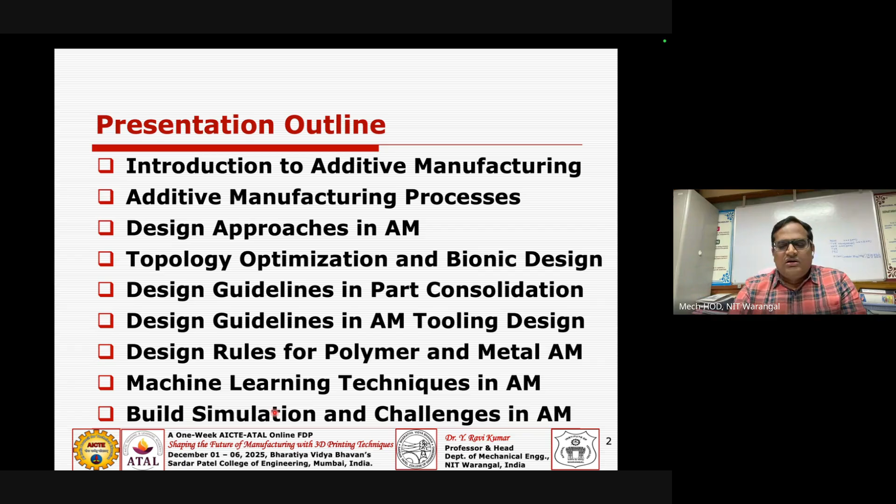So this is what I'm going to talk about for maybe the next hour or so. This is the presentation outline. Let us introduce this technology of additive manufacturing.

So additive is not a new technology. You might have heard the term rapid prototyping during the late 80s or early 90s, which was coined at that time. Now it has evolved into a manufacturing tool. Prototyping is a designer's tool, but now it has matured enough to assist the manufacturer, and a new category of manufacturing processes has emerged, called additive manufacturing.

And in common, layman terminology, this technology is also called 3D printing. Whatever you call it, the idea starts with digital data.

The input starts with digital data. Either that data comes from a CAD tool or CAD software, or it may be reverse engineering or digitized data, or even medical imaging like CT or MRI scan data, which could be the input in case of medical applications.

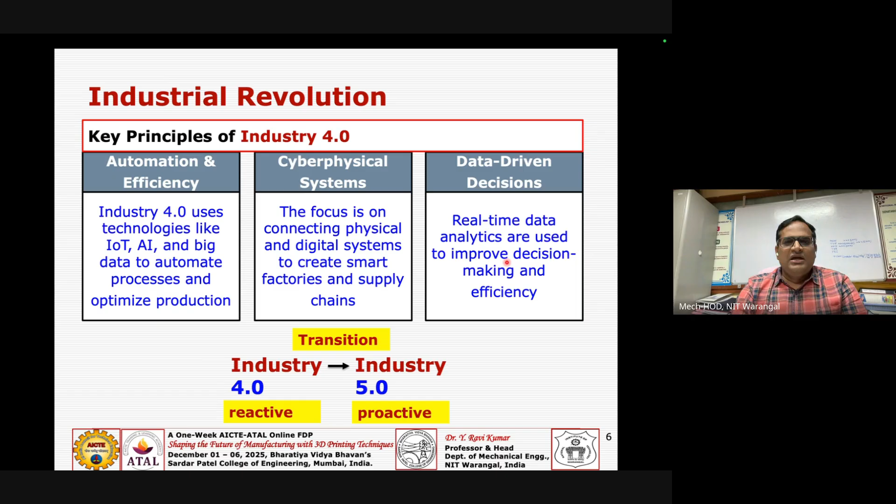Industry 5.0 is all about being human-centric, where workers are placed at the center of production, collaborating with intelligent machines rather than being replaced by them. People worry that with the fourth or fifth industrial revolution, jobs will vanish, but the idea of Industry 5.0 is human-centric and resilient, with flexible and adaptable manufacturing systems. That's what AM enables — you can adapt, customize, and personalize.

You can quickly respond to changes or any disruption, and quickly adapt AM as such. And sustainability, of course, AM, as we are talking about circular economy and the SDGs, Sustainable Development Goals, is quite inclined towards sustainability. So in brief, developing sustainability in products and services, that's about Industry 5.0, and AM will fit very well in this scenario. That's where Industry 5.0 is much about, AM is going to play a major role under this industrial revolution.

And we try to see the classification of manufacturing systems. Subtractive is the one where we have a lot of concerns like scrap or the complexity, or wherever you have a design change and need to quickly adapt. Subtractive is going to have a lot of constraints, especially if your product is complex, and now we are talking about bionic designs or topology optimized structures. So for subtractive, you have several constraints to meet those demands.

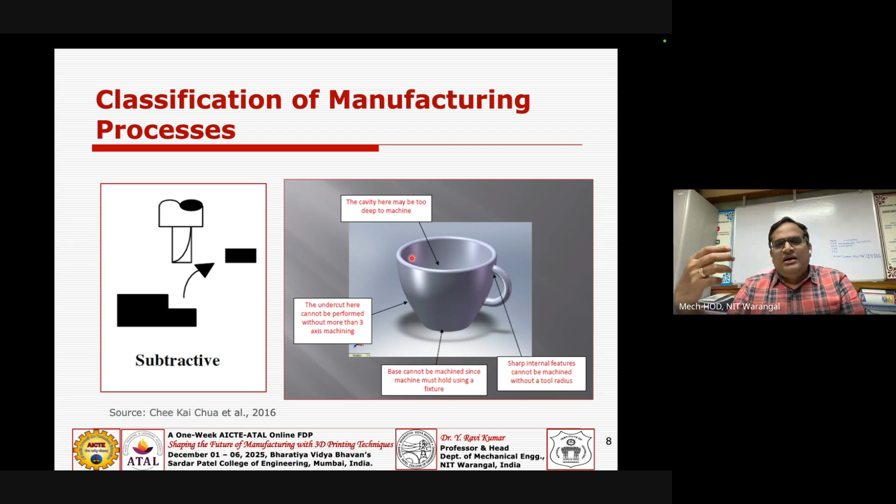Even if you try to understand, once you change the design from a simple square or a stepped kind of geometry to a free form like a coffee cup, you need to understand several constraints in case of subtractive manufacturing, like CNC technology or traditional machining technology. But you need not worry about those constraints once you migrate from subtractive to additive, where it's going to add the material. So your scrap is nominal, or literally zero, and even your complexity is free of cost here, with a lot of customization.

We'll try to understand what kind of benefits you get from additive versus subtractive. And of course, you may have a formative process, like making a mold or a die, which we use to force the billet to confine it to the shape of the tool. But again, how do you make this tool? The same story will repeat. But with additive, you don't require any die or any tool as such. So it's a kind of a new class of manufacturing, we can put it that way.

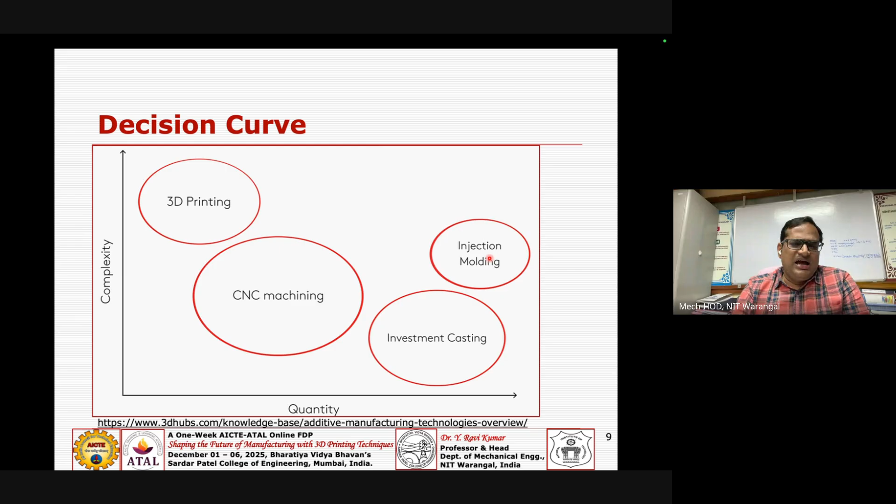So whatever may be the application, we need to start with the CAD or digital data we've been talking about. Then next you convert that to an STL file, that is the de facto standard or neutral format in AM. Then you transfer this file to a software interfaced with the machine, and set up the machine setup. It's something like a G-code, if you come from CNC, something like a G-code, but you are not writing any code here. With a single click, you are able to generate these layers or cross sections.

And then physical realization of these slices is done in the 5th step, where layer by layer it is fabricated, or built inside the machine. Then in the 6th step, we need to remove the part, say you have some supports, or we need to clean the part, then do that kind of post-processing in the next step. Or sometimes we need to increase the mechanical properties, or increase the physical or electrical properties, and so on.

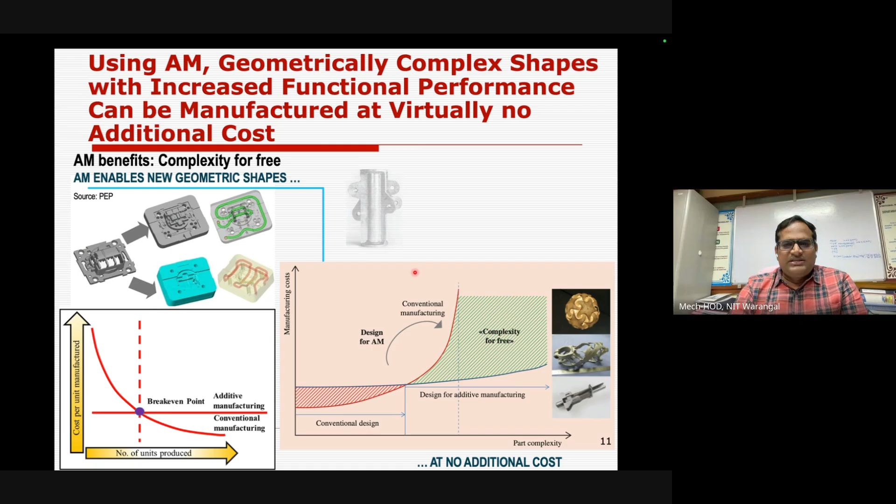Now consider manufacturing cost versus complexity. Say your design is so simple that you call it 1x complex, but now your product design changes to say 5x or 6x complex. Because of this 5x complexity, your cost is also proportionately increased to 5 times.

This is in conventional manufacturing. But if you want to make the same component through additive manufacturing technology, whether it is 1x complex or 5x complex, your cost remains only 1x. This is the biggest win here, why AM performs well with complexity. So we can conclude that complexity is free of cost in AM—you don't spend any extra money in terms of complexity.

Not only complexity—if you come from an injection molding background, your die consists of a conformal cooling channel where conventional manufacturing may not be able to make such a channel, but additive manufacturing can make these conformal cooling channels very easily. This increases the performance of the die and die life, and in that way your efficiency or functional performance of the system increases. So you're not just getting cost benefit, you're getting double benefit, even triple benefit.

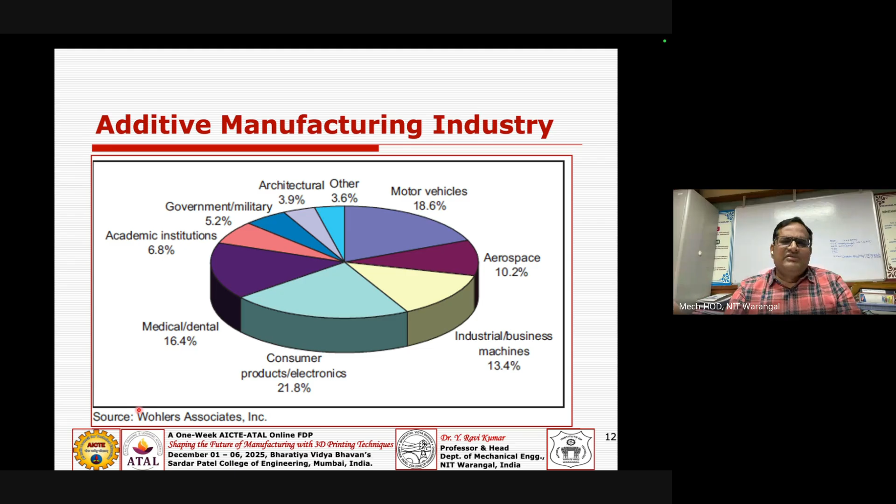If you compare with traditional manufacturing methods and look at the AM industry, consumer products and consumer electronics is the biggest market at 21.8%, followed by motor vehicle—automobile and automotive together—at 18.6%, and medical and dental together at 16.4%. Aerospace is 10.2%, industrial machines and business machines were 13.4%. Academic institutions like us may be 6.8%, government military 5.2%, architecture 3.9%, and others maybe 3.6%. This is the Wohlers statistics, which shows the market share of AM in various industrial applications.

Now we'll talk about AM processes. The previous talks were predominantly on materials and their characteristics, so I won't spend much time here. But broadly, we need to bring the feedstock in any one of four forms: a powder in granulated fashion, a filament in wire or rod form, a sheet, or a liquid. These are the four broad feedstock forms.

Coming to the materials: polymers—again thermoset, thermoplastics, amorphous, semi-crystalline. You can make metal alloys, ceramics, composites. So these are all the four standard engineering classes of materials.

Apart from the standard engineering materials, functional materials, electronic, shape memory, biological material, maybe a living cell or a stem cell could also be the material, or it may be food printing, or 3D printed houses in construction, building the structures, or building the bridges. So you have diversified materials here, not only restricted to the four classes of engineering materials. So you have an additional bunch of materials here. That is the winner here.

So anyway, I'm not going to spend much time on these AM processes. The 7 AM processes and feedstocks, as I already mentioned, may be a liquid, powder, solid. And then the AM principle would take longer to explain. But in a nutshell, it could be a polymerization process or jetting. It may be inkjet, binder jet, atomizing the powder particles, or melting and solidification, or joining. So all your 7 AM processes may work on different principles.

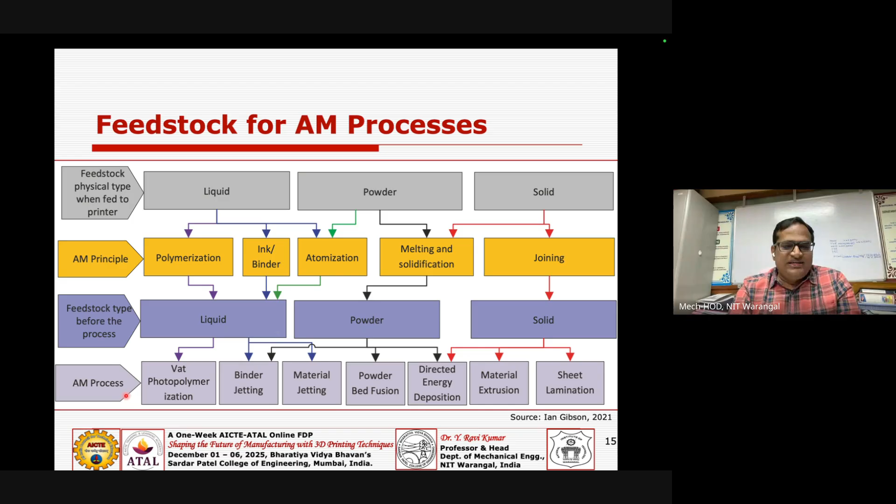And of course, your feedstock material and your energy source could be a laser, an electron beam, a plasma, or heat energy or whatever. So you may have different energy sources, but all your 7 AM processes have a specific feedstock form. All these are material specific, feedstock specific, and energy source specific, right?

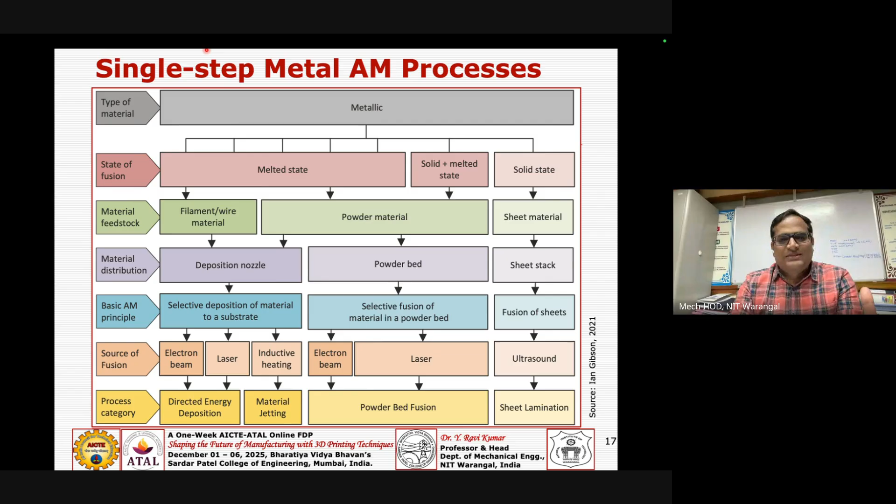I hope the previous speaker might have talked about a lot of materials, but in a single slide you try to understand amorphous polymers, predominantly the material extrusion process, and maybe polycarbonate through powder bed fusion. And your thermosets, predominantly you can use 2 AM processes. One is vat, another one is material jetting. And the semi-crystalline class of polymers, you have predominantly powder bed fusion technology.

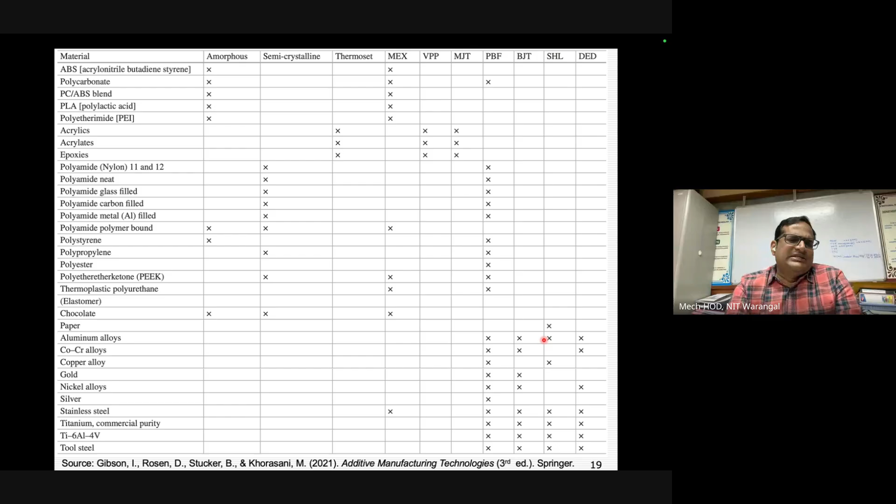And the metals and metal alloys, as we already discussed, 4 AM processes like powder bed, binder jetting, sheet lamination, and DED. These are the 4 technologies predominantly for metals. So with this, the materials and the physics involved in all 7 processes and the materials used for all 7 processes.

But these are some of the powder bed, directed energy and solid state processes, as we already discussed. Under these three, with powder, wire, foil or rod, you may have a laser or electron beam, or it may be blown powder, arc-based deposition, laser wire deposition, or electron beam deposition. It could even be ultrasonic additive, friction stir additive, or cold spray.

Then how do you choose your metal AM process? It is your precision, or rather your resolution, versus deposition rate. Powder bed will give better resolution, but the deposition rates are very low. On the other hand, arc-based deposition or friction stir additive have huge deposition rates, but the precision or accuracy is very low. You can make only near net shapes, but your deposition rates are very high. So you have a trade-off between your precision and the deposition rates.

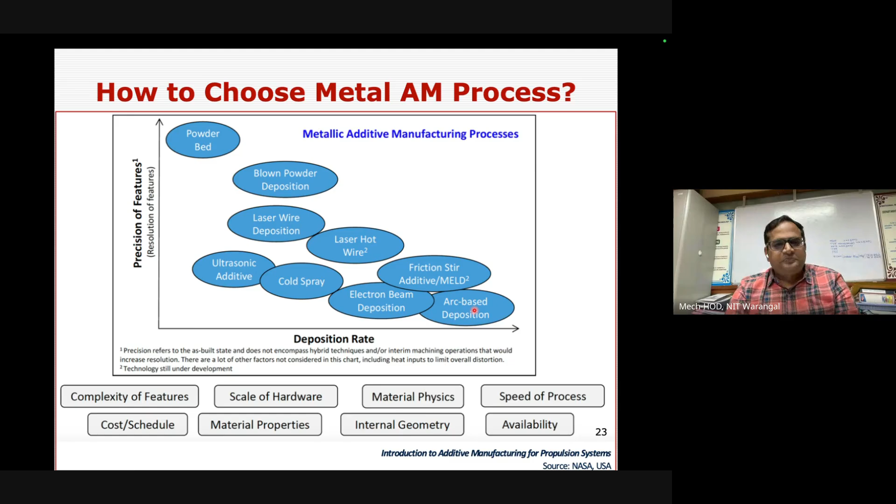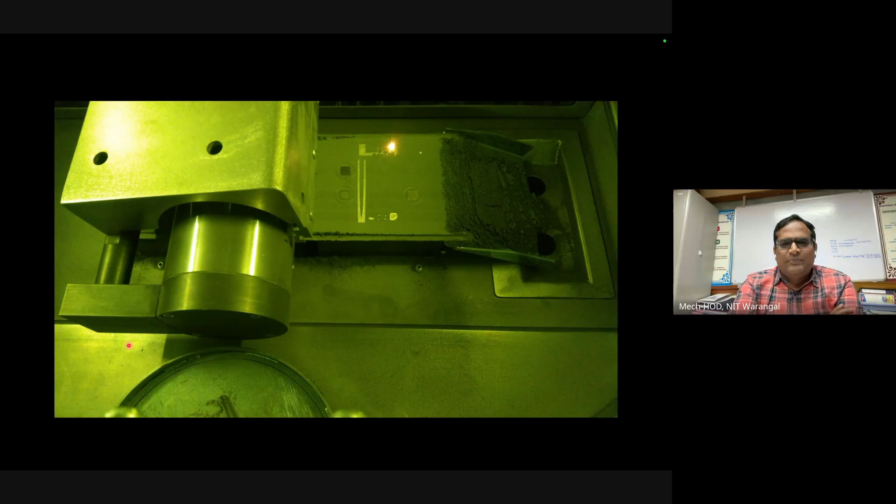Powder bed and electron beam are the two major metal processes we are talking about. This is one small video from our lab. This is a powder bed based metal 3D printer or AM machine, where you can see the laser melting the powder particles, which could be on the order of 25 to 30 micron, with loose powder around. Then for the next layer, the roller spreads powder onto the previous layer, and the process goes on. This is the typical powder bed laser energy source.

You have a lot of nickel based superalloys, from Inconel 625, Inconel 718, Hastelloy, Haynes. You have copper based alloys, aluminum based alloys, iron based alloys, titanium based and cobalt based alloys, and quite surprisingly refractories, from tungsten to tantalum, that you can process. Bimetallics are also coming in a big way, and metal matrix composites, of course. These are some of the metals you can process through metal AM systems.

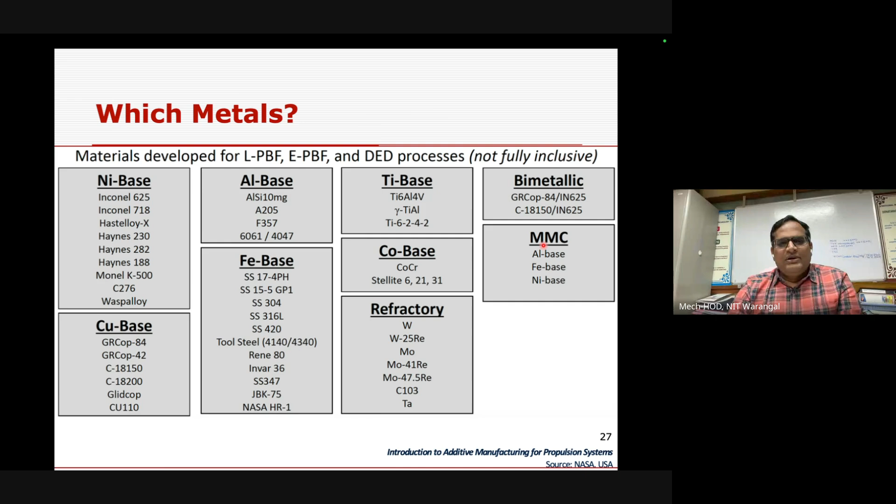These are the areas where in metal you have a lot of potential. Then we will stick to our design approaches in additive. So let's try to understand the design approaches in additive. As I already mentioned, you have two broad approaches. One could be designing right from the scratch or using some algorithmic methods. That is one way.

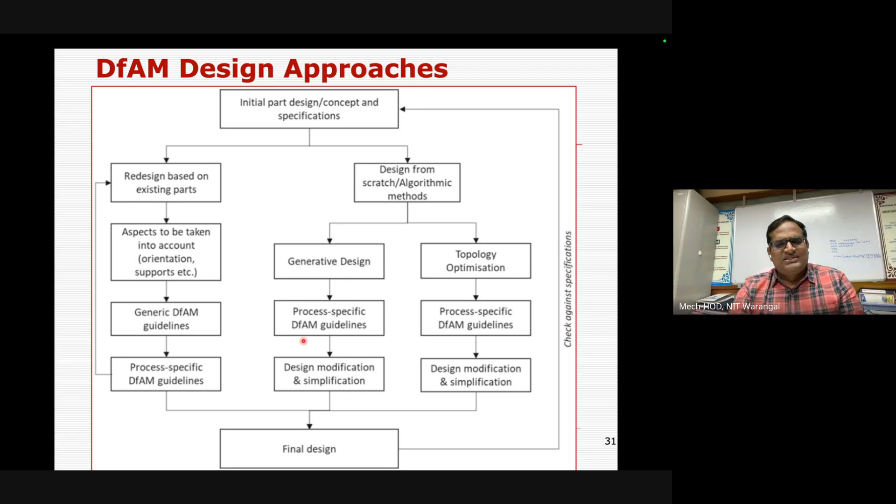Or even if you are doing it right from the scratch, maybe you come from the generative design domain, or from the topology optimized design. Then you follow the process-specific DFAM guidelines and do the design modification, simplification, and then the final part. So this is a kind of design approach in DFAM.

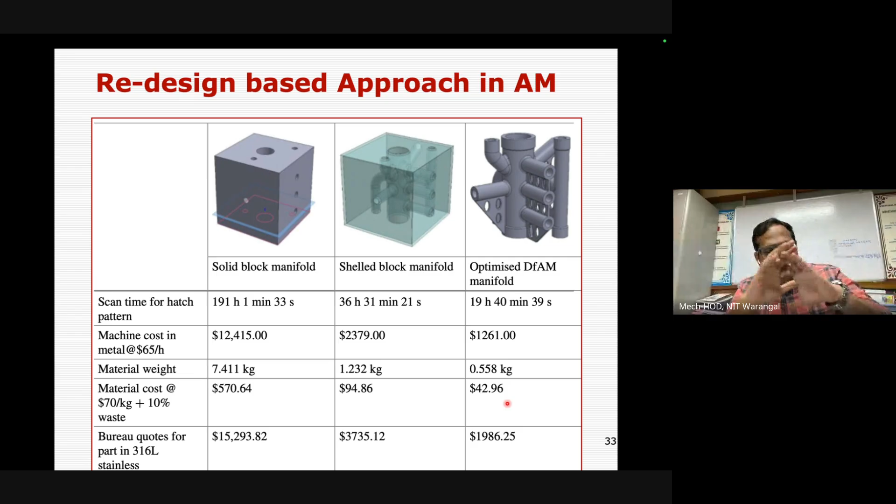So what is the bottom line here? Better always do a redesign in such a way that you will get a lot of cost benefit, and compare the existing performance versus the modified design performance. That's why industries like aerospace, automobile, medical, they are behind this technology. Then why is design so important? So you might have understood the essence of design in AM, right?

So you have a lot of design freedom now. Instead of the six phases in a conventional process, your designer now has a lot of design freedom. He has totally changed the design in such a way that your fitment has become simple, your functionality has been increased, and your cost has been reduced. So your designer is not curtailed in his innovation or his freedom, because of AM. That is conventional versus AM.

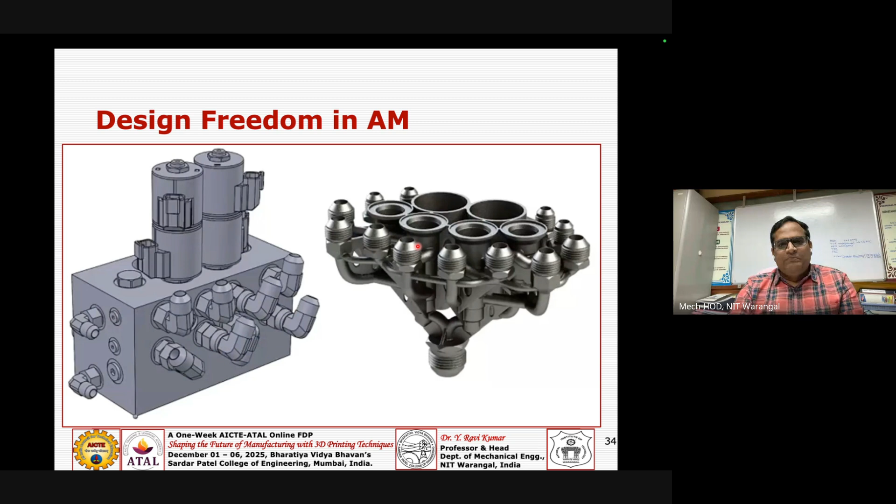Let me summarize. So you may have the 10 principles or 10 benefits. Manufacturing complexity is free. Whether you make a cylindrical geometry, a bio-inspired geometry, or a topology optimized structure, you are not paying any extra amount for the complexity. So your manufacturing complexity is free of cost in AM. And also your variety is free.

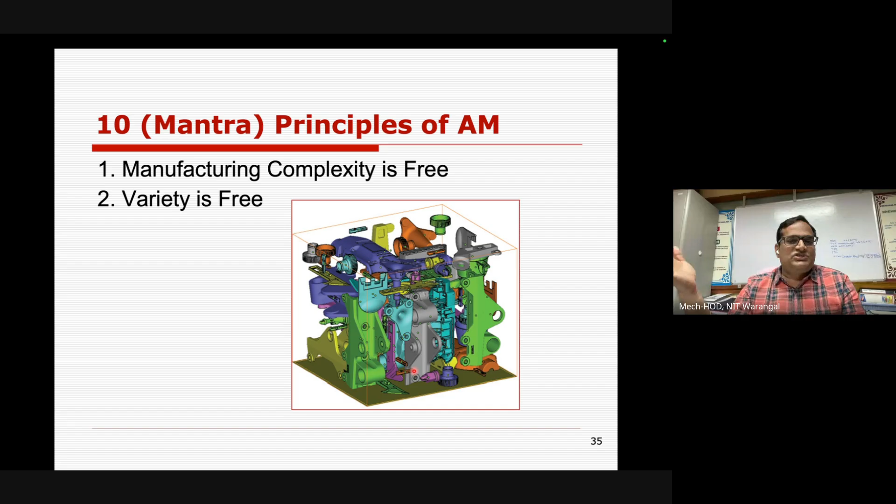You need not worry about writing different codes in the case of CNC for 100 components with 100 different geometries, or about a lot of tooling or fixtures. That's conventional. But here, all this variety is free. It doesn't matter what kind of geometry you're producing. And it doesn't require any assembly at all. You can even make it part consolidated. We'll elaborate on this in the upcoming slides.

And then zero lead time. Of course, you don't require any supply chain logistics, conventional versus AM. You need only the digital inventory, right? It doesn't require any physical inventory, only the digital design inventory. So your lead times are absolutely zero.

And you have unlimited design space. Designers' imagination or innovation should not be curtailed by the capability of the conventional manufacturing process or whatever fabrication technique you're going to use. You have unlimited design space here with AM. And zero skill manufacturing. You are not writing any code at all, so you need not worry about G code or M code.

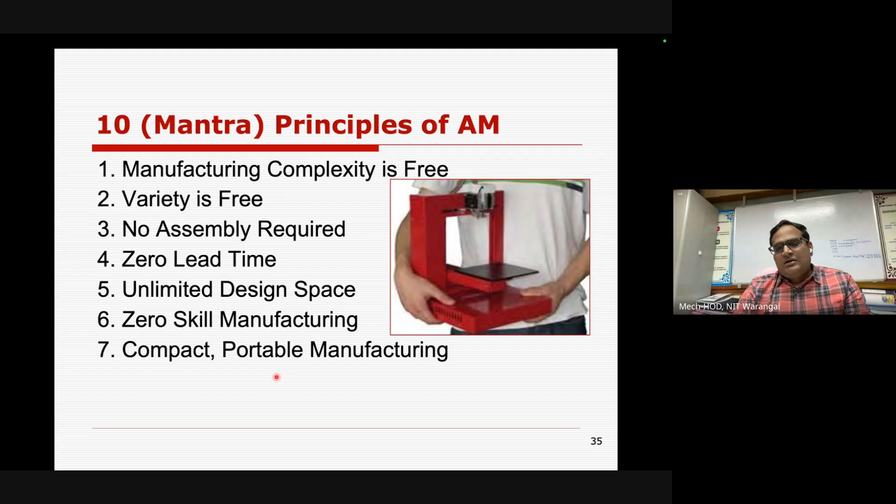Basically, your manufacturing skills are zero or minimal, right? And these machines are very compact and now desktop based. Now the metal machines are also coming in more compact form, not only the polymer based machines. Now you can have less wastage and byproduct. Of course, you are adding the material here, and infinite shades of material.

So in a conventional manufacturing process, you can always make single-structure components, but here you can make multi-structure, multi-material. That is the biggest advantage here in AM. So you can simultaneously print electronic and non-electronic material. You can simultaneously print flexible and rigid, or opaque and transparent, right? So you have a lot of flexibility in terms of material choice and material processing. Multi-material, multi-structures, you can make it.

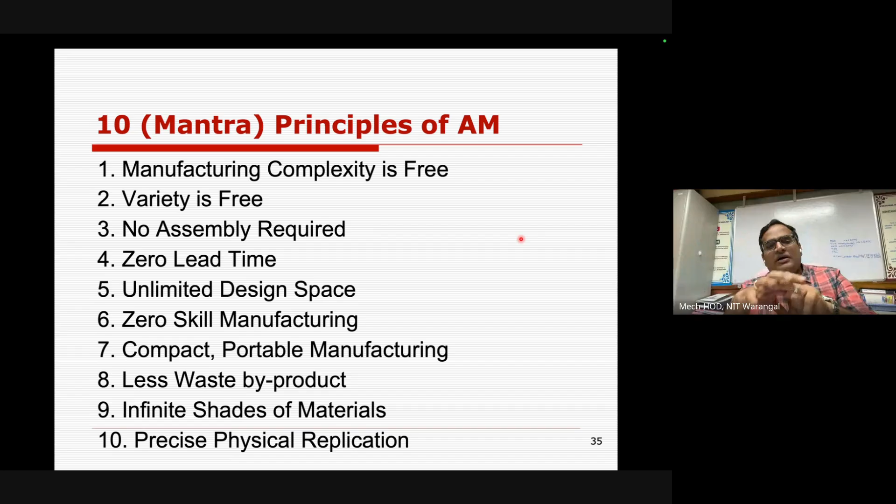And then you can precisely replicate the physical form into a soft form once you integrate digitizing or a reverse engineering technique with AM, right? So these are some of the benefits you can talk about.

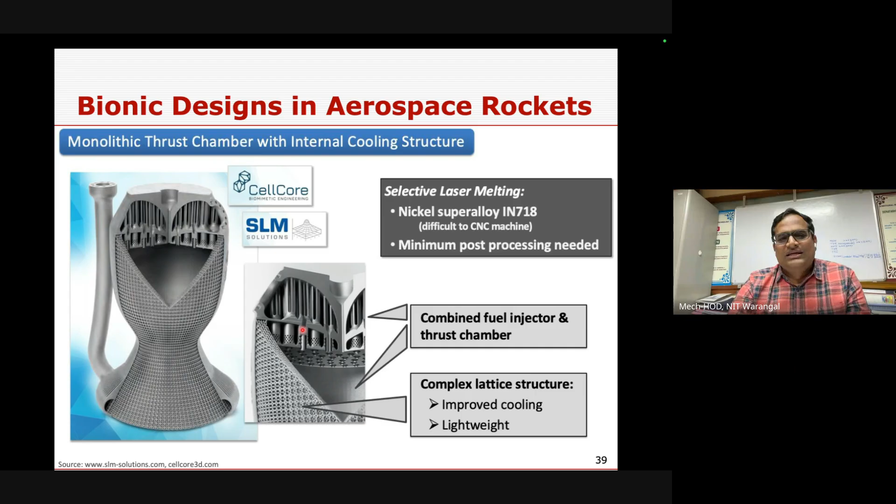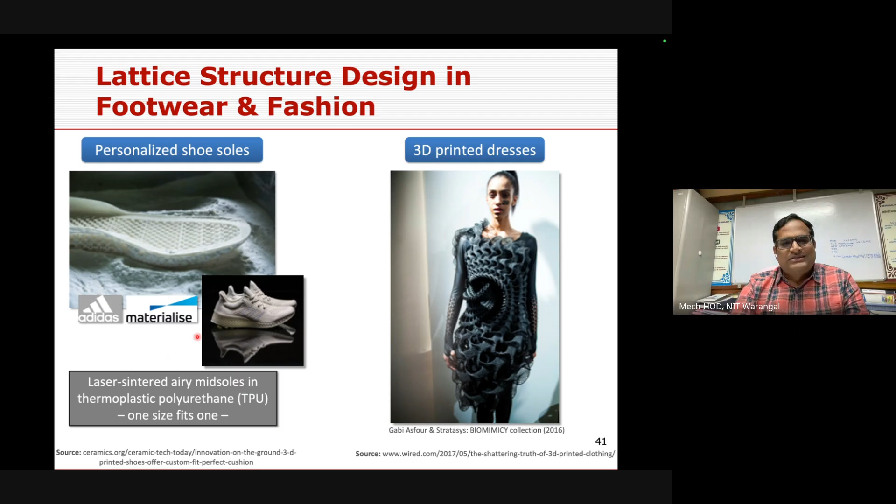And also personalization of shoe soles. Each person is unique in weight, dynamics and all the mechanics, but you can very well personalize as per the requirement. That's why companies like Adidas or Materialise are using this kind of technology to print personalized shoe soles. And in the fashion industry also, people are using this for personalization. And then most importantly, I'm sure the other speakers may be talking more about biomedical applications.

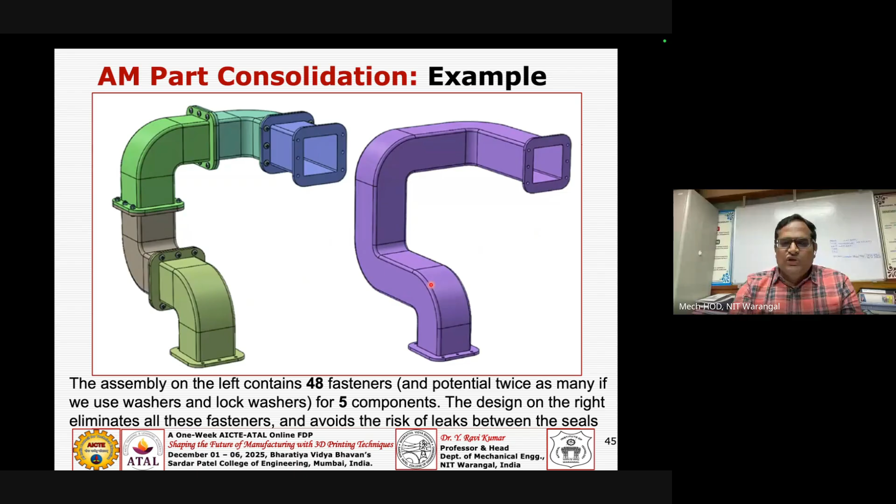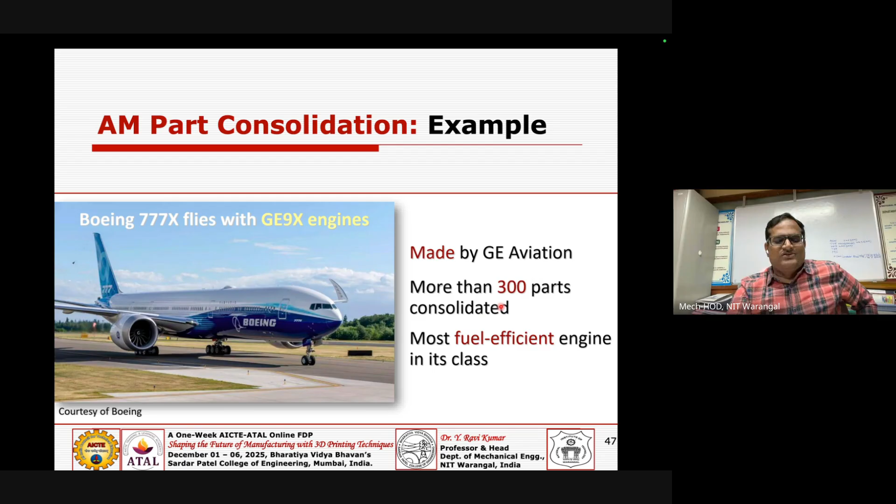Even 1 gram of savings is good enough for payload reduction and further fuel efficiency. So that's how the aero industry is driving AM adoption.

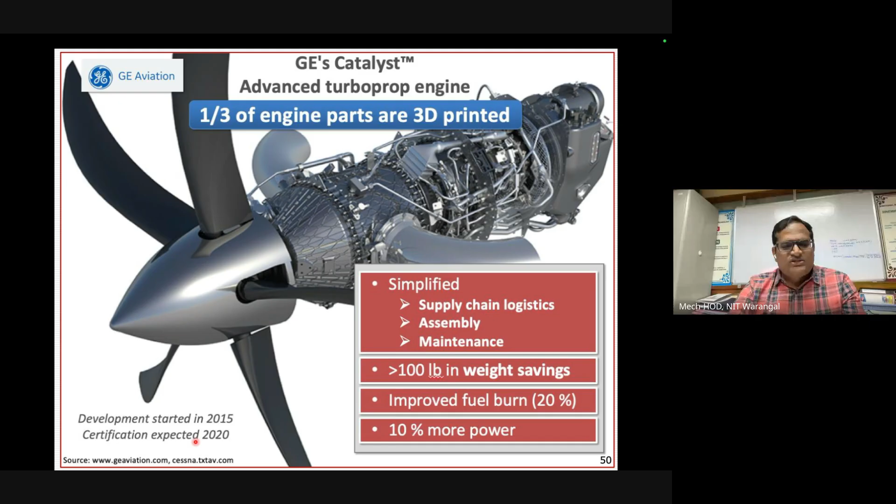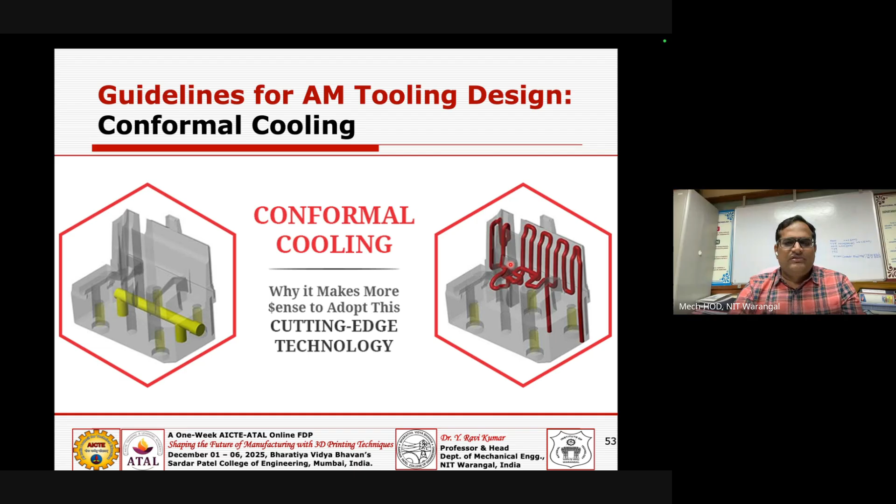The next one is the tooling industry, with conformal cooling channels. Unlike straight channels in conventional tool making, conformal cooling channels conform to the shape of the component, so you can extract heat very effectively. This matters because the cooling stage takes 60 to 70% of your cycle time.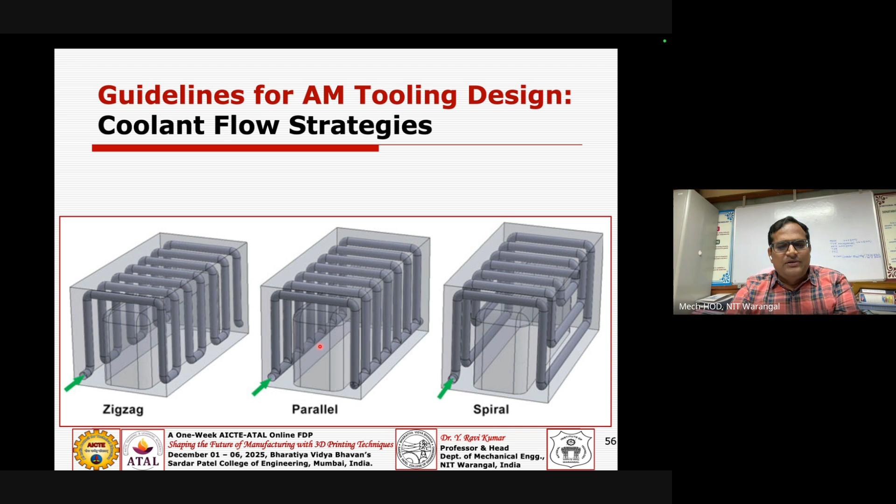So you can see several design strategies, maybe the pattern of how the coolant will flow - zigzag, parallel, spiral - and even the cross section of your cooling channel. You have guidelines to be followed in order to use this more effectively. In the literature, people are trying different cross sections and patterns to improve the cooling efficiency of the tool.

So you can see how cooling channels have become an integral part of your tool. You don't design it separately and assemble it; based on the feature, your conformal cooling channel has been designed and printed in a single attempt, maybe through powder bed or DED - metal tool steel you can very well use as one of the printing materials.

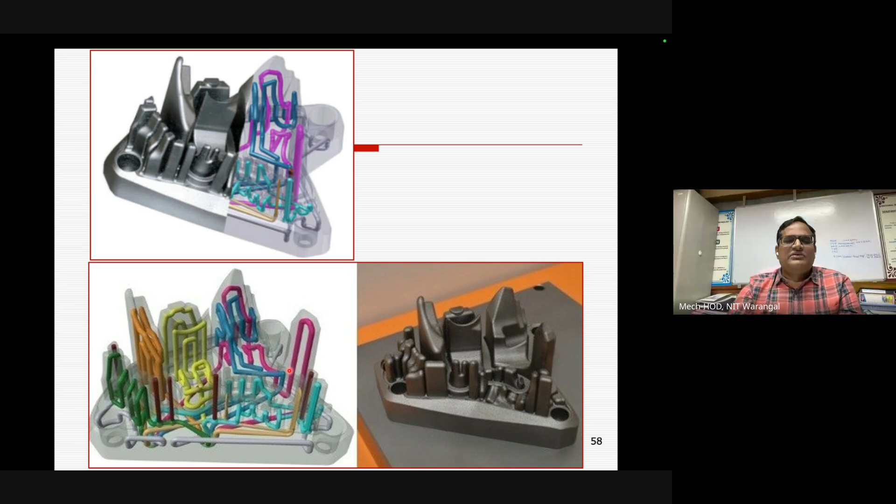And then we'll focus on the polymer design. The orientation is going to play a major role. You cannot get the same unidirectional property. Most of the time it is anisotropic in nature in AM. Why? Because you are adding the material, but the direction in which you add it will judge your mechanical property, your strength, or your spring effect.

Then you have a lot of freedom here to fabricate in any orientation, but which one works for you? We need to understand the application or functionality of each and every feature, and what is the critical feature in your component or product. Based on that, we decide whether we need to fix this orientation to fabricate.

So if you fix it this way, this is a very weak clip and it will almost certainly break. But if you fabricate in this orientation, yes, you do compromise the clipping spring action for a strong hook. If you have another fabrication option in this orientation, it has the best spring, but your hook is still weak.

So what is the moral of the story? We need to understand the application, or the functionality, the critical feature. Based on that we select your orientation - that's where you can minimize to some extent this anisotropic nature, following the kind of guidelines to fix the orientation.

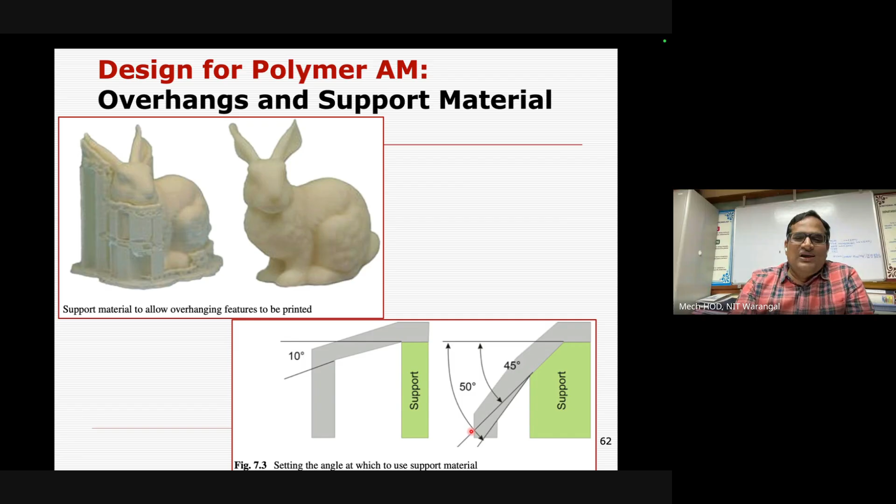Again, it depends on the layer thickness you're using. So you can consider all these design constraints, rather call them guidelines, to fix your orientation, wall thickness, or whatever. And then for support structures, the overhang angle is going to play a major role. Once you start using this technology, you can control these kinds of angles.

That's where you can minimize the support material significantly. For example, at 50 degrees it doesn't require any support, but at 10 degrees it requires support. If you have a bridge kind of feature, we need to provide supports there, and where you have overhangs, we need to give supports. The orientation matters a lot - you can see the green color is the support material, and the amount of material consumed in one orientation is different from another.

Use some design for AM guidelines where you have a minimal support structure. Sometimes we need to tweak the design to some extent to minimize your support structure. So these are the guidelines or considerations we need to follow while fixing your design.

Then thickness is another matter. If it is 2 mm thick, a 0.5 mm hole or slot can be realized. But if you increase the thickness of the wall to say 4 mm, this feature may be missing. So we need to understand these constraints.

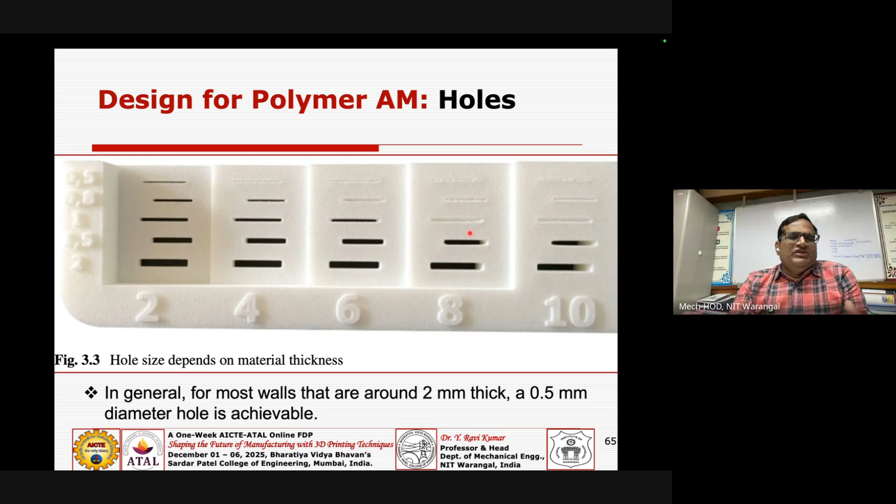Based on that, we need to redesign these holes, or come out with guidelines which should be followed. Ribs are another area where you can increase the strength.

With metal, yes, it's a bit more challenging than polymer, because you have high melting temperatures. So we try to understand parameters like scan space, layer thickness, scan speed, and energy absorbed, reflected, or scattered.

None of these lasers is more than 70% efficient, even 20-30% efficient sometimes. Nowadays you may have fiber lasers where again the efficiency may be more.

But anyway, you have lack of fusion, pores, cracks. We need to understand how to minimize this, maybe by adjusting process parameters.

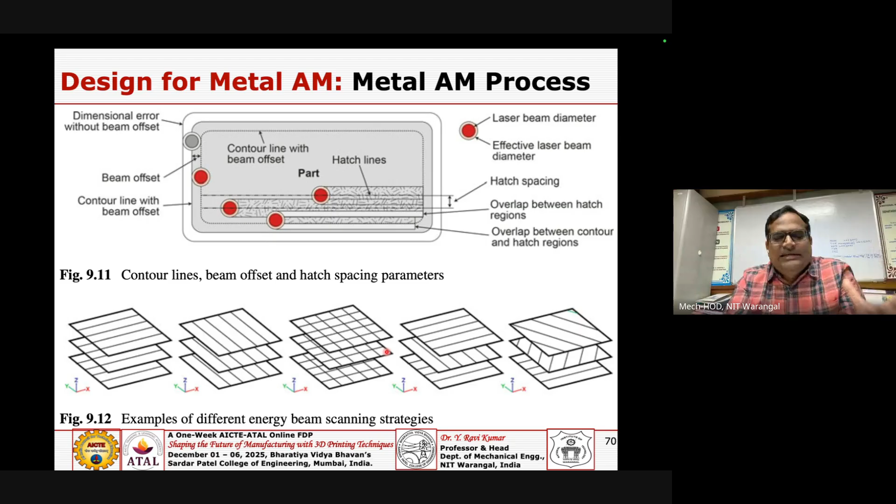Once you model this, we need to understand the energy density. It should not be too low or too high. We need to optimize this energy density, which is a function of laser power, scan speed, hatch space, and layer thickness. This is the relation we need to understand.

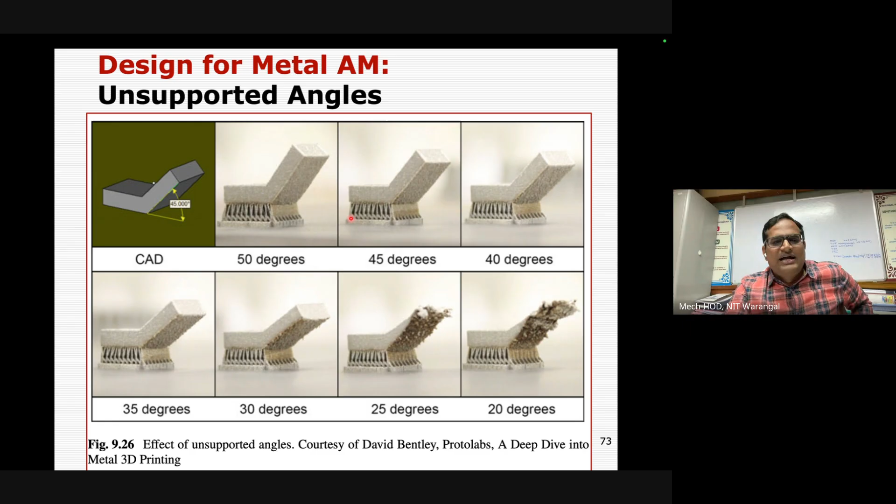Large horizontal surfaces should always be minimized. As I already mentioned, the overhang angle dictates a lot in terms of supports. We need to understand what is the minimum overhang angle or thickness required.

And these bridges, what could be the bridge length? Maybe 1 mm, 2 mm is fine, but 3, 4, 5 mm is an issue. We need design guidelines to adapt in order to realize all these features well, otherwise you may end up with a bad component.

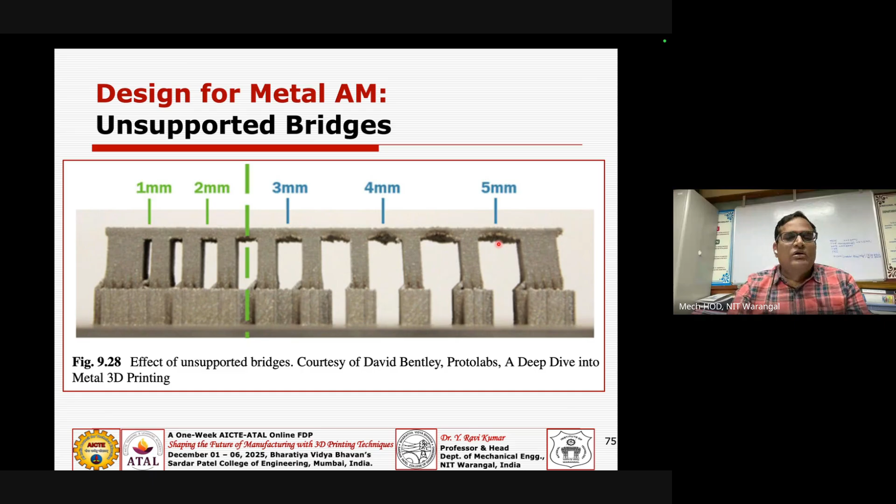Residual stresses, as already mentioned, may detach the support from the model, and also cause internal cracks. One way of addressing this is to change the scan patterns, optimizing them to reduce these residual stresses.

Thickness is another area where you try to maintain uniform thickness across the entire structure rather than abrupt changes in thickness, to avoid stress concentration and maintain uniform thickness across the walls.

Horizontal holes are another challenge in metal AM, especially up to 2 mm, 4 mm, 6 mm it's fine, but once you go to 8, 10, 12, 14, 16, 18, 20 mm, without a support structure you cannot realize this kind of feature.

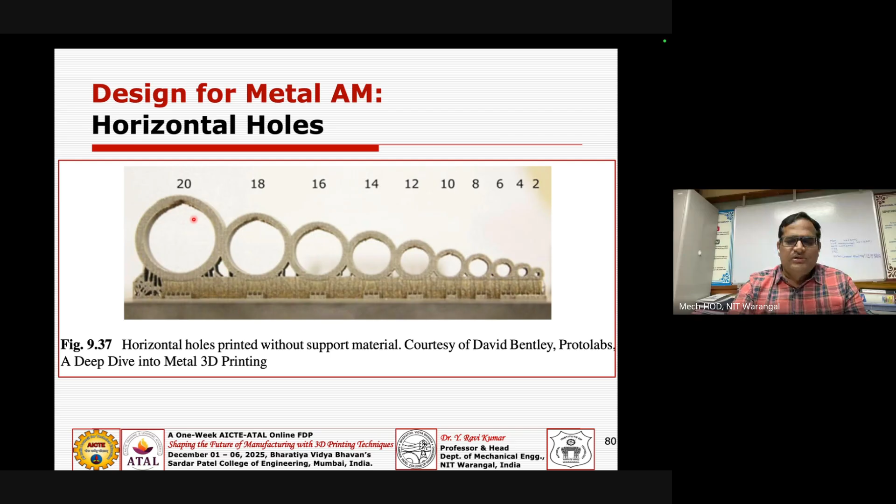Then what is the solution? If it is more than 8 mm, either you redesign it to an elliptical, teardrop, or diamond shape. There are some guidelines which we need to follow.

The positioning of this also matters a lot. Take a typical powder bed roller, how it touches your part - the contact area between the roller and the part matters a lot.

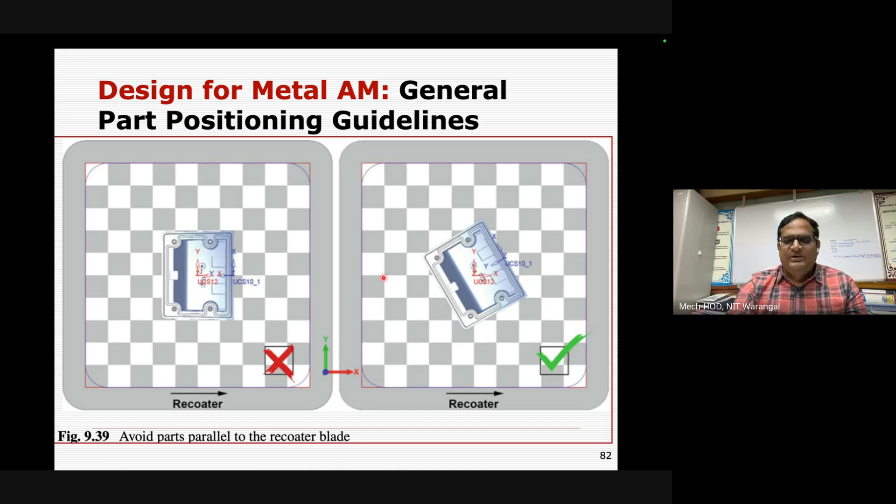Then we need to understand that we need to give less force, less stress or less pressure to the part with the roller. I'm talking about the powder bed case. And we need to follow some guidelines. For part positioning, don't put them in line, but maintain some gap like this, right? Again, the same logic: you should not give much roller pressure to the part.

And also sometimes it will damage the part. You need to understand that in some bad components, your roller has hit the part here, the features here. So why? Because you didn't follow the guidelines. Then we need to follow those, and the height also matters, which one we need to keep. So all these part positioning guidelines we need to follow.

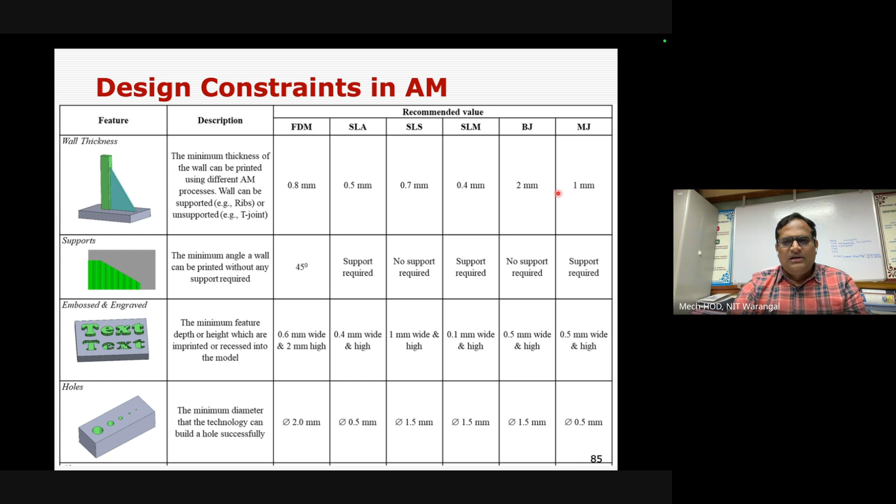And of course, each process will have its own constraints. Because I'm running short of time, I might not be able to explain all this, but anyway, I'm sharing this PPT. Each process will have some constraints about the wall thickness in all AM processes, and support also, and embossing, engraving textures, holes, and also clearances, pin diameters, escape holes, and the holes ideally, which we already discussed, like teardrop, fillets. Yes, you can always have some kind of modification, preferably like this, right? So this is the ideal, which we need to understand.

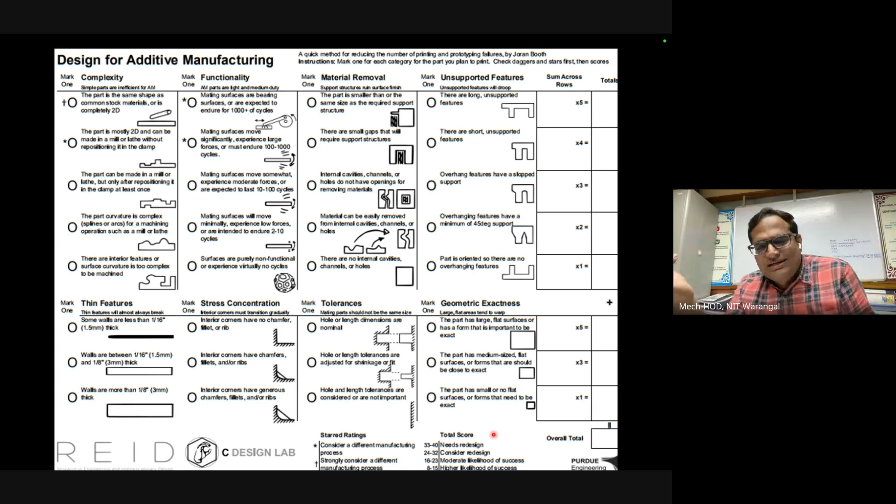And there are some design for AM people developing some kind of portals. This is one from Purdue University. They made some kind of design for AM evaluation. You can import your design, and then it will tell you the score. Based on the score, whether we need to redesign it, or consider the redesign, or we moderately or badly need to change our manufacturability aspects.

And let me come to the last part of my presentation, machine learning techniques. Of course, I'm not an expert in using these tools, but let me give an insight of these ML tools in AM. But still, it is early. I can say AM itself is emerging in terms of its materials, in terms of its applications, and so on. But here.

Sir, I think you are muted, sir. Sir, you are muted. No, okay. Hello? Now can you hear? Actually, my AirPods. Now, are you able to hear me? Yes, sir. Now audible. You are audible, sir. Yeah. I am removing my AirPods. I may be using the speakers. Now, is it okay? Okay, sir, no problem. Right. Thank you.

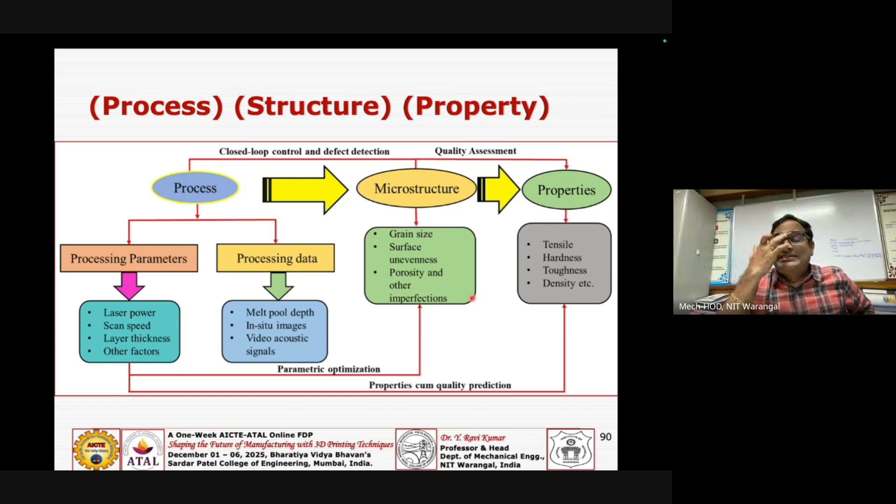So for your real time, you have sensors to capture, right? I can say this is an initial stage, and a lot has to mature in this direction. But there is an idea where you can do a lot of integration of machine learning tools to further enhance your AM properties and microstructure control, and you have a closed loop control here. That is the biggest advantage of trained data in the case of machine learning techniques.

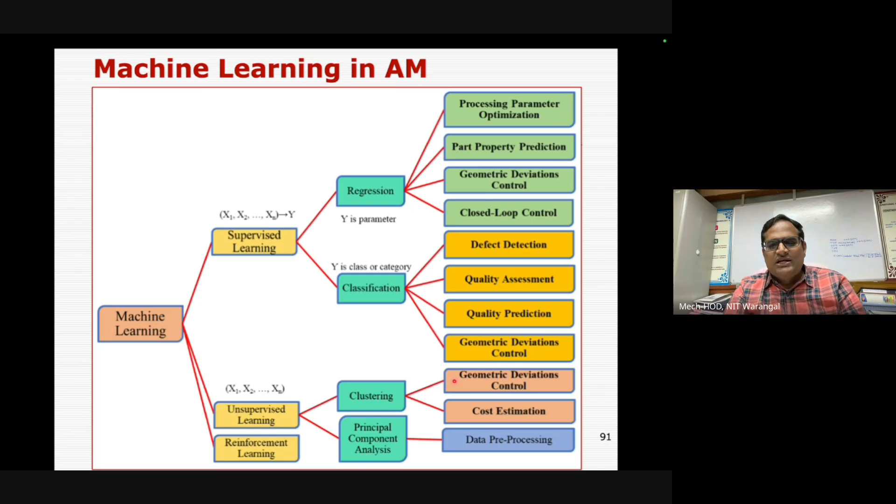So in machine learning, your supervised learning can be regression techniques for process parameter optimization, part property prediction, geometrical deviation control, and closed loop controllers. And classification techniques can be used for defect detection or quality assessment, quality prediction, and geometric deviation control. And clustering algorithms can be used for geometrical deviation, cost estimation, and data pre-processing kinds of applications.

And AM processes, like characterization of the powder spreading in the case of a powder bed system, or it may be DED with powder, or process optimization; in-process defect monitoring can also be trained here for your AM process optimization. And these are geometric design, process parameter configuration, and in situ detection.

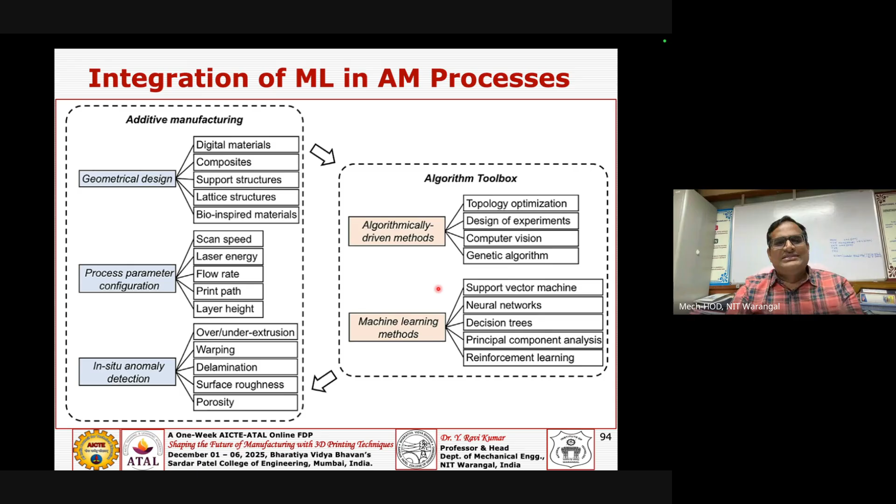You have these AM technologies, what purpose they are used for, and what parameters they are optimizing, and the algorithms or toolboxes people are using for topology optimization or genetic algorithms, or machine learning methods like ANN or CNN, which have been integrated here for AM process optimization, or in continuation with quality control, microstructure optimization, material formation.

Quality control: people have already used these kinds of ML techniques for the quality control purpose of AM. Consistency is still the biggest challenge in AM, how best you can consistently produce quality parts. That is the biggest challenge still. It's an open challenge in AM.

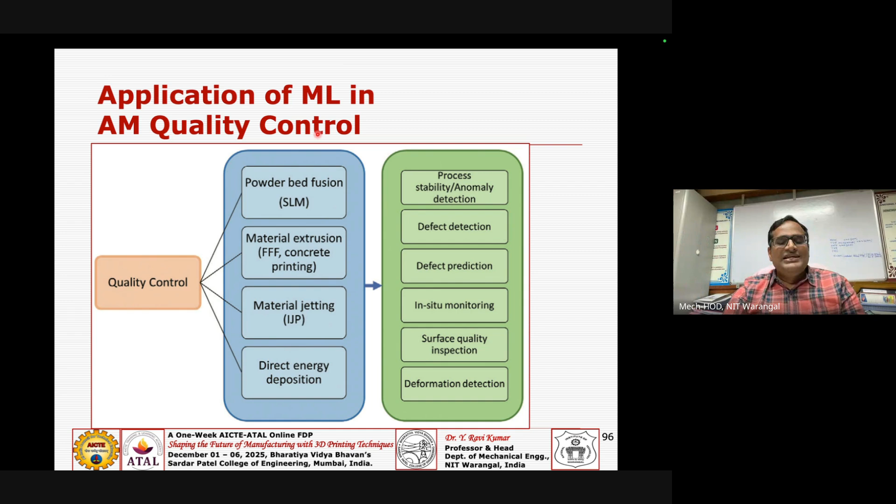And that's where in-process monitoring with ML will help you bridge that gap to some extent, monitoring the melt pool shape, thermal imaging, or melt pool intensity. All that you can do in real-time in-process monitoring, where you can find lack of fusion or keyhole porosities.

Then how you can have a closed-loop system here to minimize this by automatically adjusting the process parameters. It may be in the initial stage, and we need to wait for these techniques to mature to integrate them in AM. Yeah, you have several areas where you can do a lot of process optimization, material design aspects, and data extraction and optimization, right?

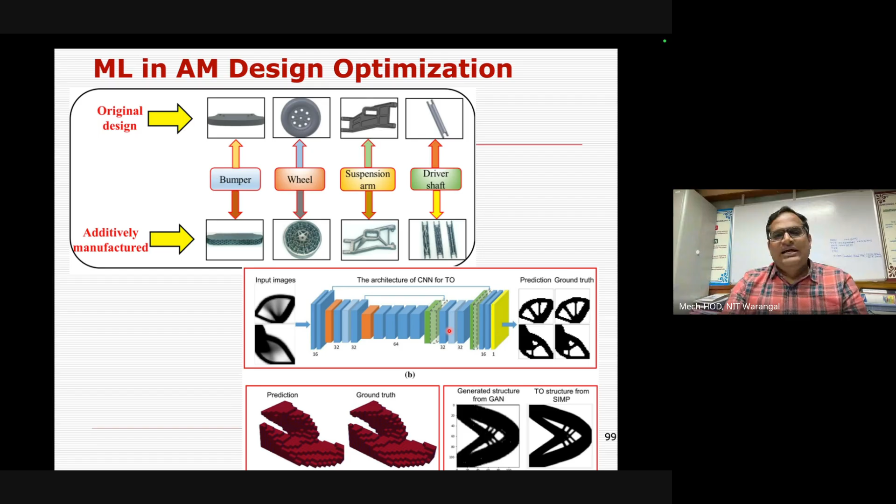And let me come to the conclusion part. Of course, for build simulation, people may be using multi-physics, multi-scale modeling to simulate compensating the distortions, minimizing the residual stresses, distortion compensation, support structures, and recoater damage.

Though you have software which is specific to the proprietary domain. Say we have a machine here, and we may be using 3DXpert. That is proprietary software from 3D Systems, and there may be some other software specific to that machine, but still it is not open source. For these simulations I'm talking about the metal aspect; for polymers you may have a lot of open source simulation packages, but still this should go further.

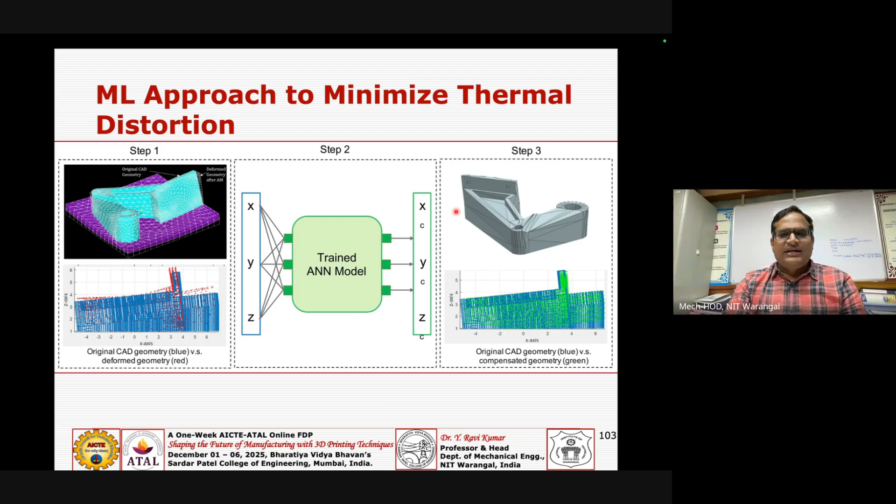You can even integrate this into an ML approach, as I already mentioned, to further enhance these quality checks or thermal distortions, how you can train a model here, right, to compensate any deviations from the CAD to the final fabricated part.

Then in a nutshell, an ML approach to understand the process parameter configurations, the controllable parameters. You may have around 200-plus parameters, I'm talking about the powder bed based metal printer. So how do you optimize those parameters? You can create a model here, train on the data, and then integrate this, right?

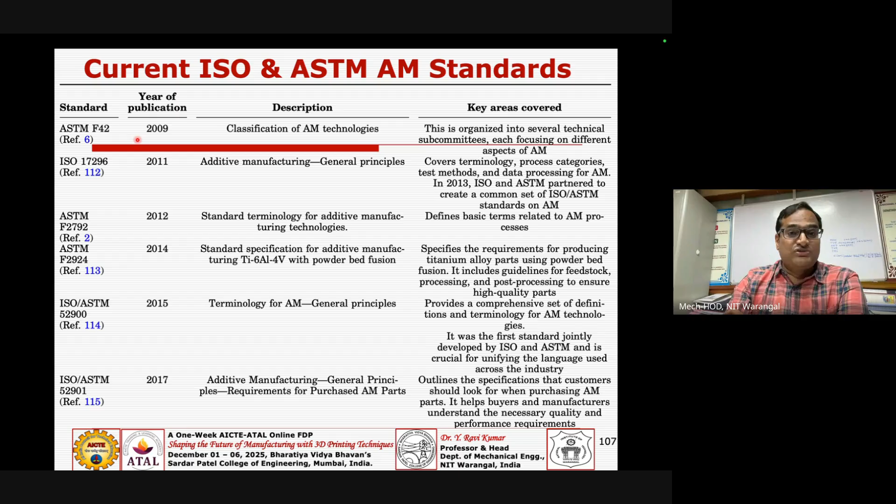And fabrication challenges: as already mentioned, the ASTM or ISO standards are very few. This AM journey started in the late 80s or early 90s, but ASTM formed the F42 committee in 2009 only. So hardly you have less than 75 published or developed ASTM ISO standards in terms of design aspects, feedstock aspects, characterization of the powders or wires, or even design for AM standards, but these are very few.

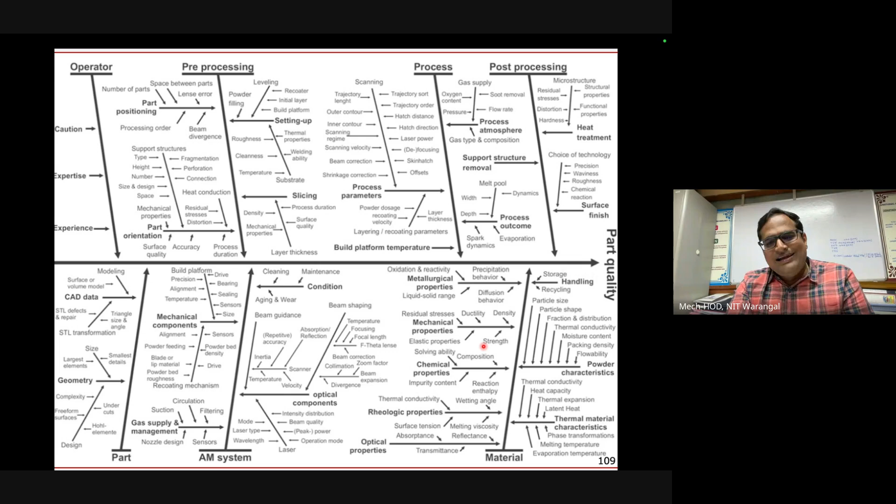So it is not that easy to optimize. If you change the material, your entire physics will vary, right? Your melting point is different, and the residual stresses are more. You cannot generalize. You have optimized this set of parameters for this material; it may not work out for some other material, or if you change the composition of your metal alloy, again you need to work out your optimum set of process parameters.

So yeah, let me summarize my talk. We started with the introduction to additive manufacturing and some AM processes, how the design aspects come into AM processes, the design constraints or guidelines to be followed. They vary from one process to another, and within a process, from one material to another. And design approaches, as we discussed, from scratch or changing an existing design, direct, adaptive, or design for AM approaches. And topology optimization and bionic designs, design guidelines for part consolidation, design guidelines for AM tooling design, and some design aspects.

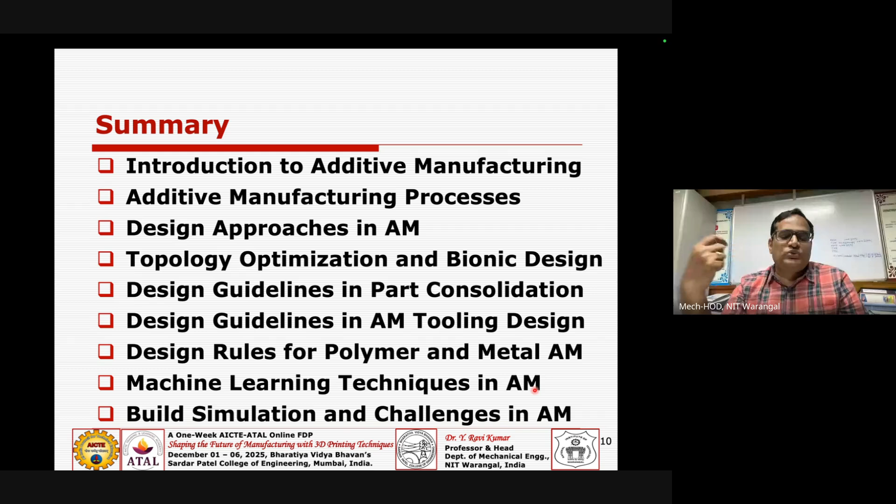I have given some glimpse of polymer design guidelines and metal design guidelines, and machine learning techniques, how they can be integrated into AM for quality or characterization, enhancing the properties, and making a closed-loop controller to optimize the processes, and build simulation and challenges. This is what we have discussed.

And these are some of the facilities we have. We have a 3D Systems DMP Flex metal AM machine of powder bed technology, which can print in steel, nickel-based superalloy, titanium, cobalt chrome, and aluminum alloys. So we can try with other materials also. And then we have a ProJet 3D Systems material jetting system. It works even with 16 micron layer thickness; it will go up to that resolution.

And we have Stratasys make machines, and then desktop machines, which we use for academic and research purposes. And we have AM softwares like Mimics, Magics, 3-matic, and simulation software like 3DXpert that works for this metal powder bed based 3D Systems machine. So these are some of the AM facilities.

Sir, what does 4 refer to in Industry 4.0? Like you mentioned Industry 5.0, the skilled workers, something like that. So what does 4 refer to in Industry 4.0?

No, this is like, say, you have a first industrial revolution that is from the 1780s. So this is basically the time scale. So you have the first industrial revolution, 1780s to 1860, the second industrial revolution is 1870 to 1960, the third industrial revolution is 1970 to 2010, and the fourth is after 2010 to 2020, but now it is 5.0.

So that refers to the time scale only, where you can understand from 4 to 5, it is hardly taking 5 to 10 years to evolve from one industrial revolution to the next. Whereas you can see almost 100 years difference from 1 to 2 or 2 to 3 and so on. So from 4 to 5, it is hardly taking 10 years to evolve new technologies, maybe in terms of sustainability.

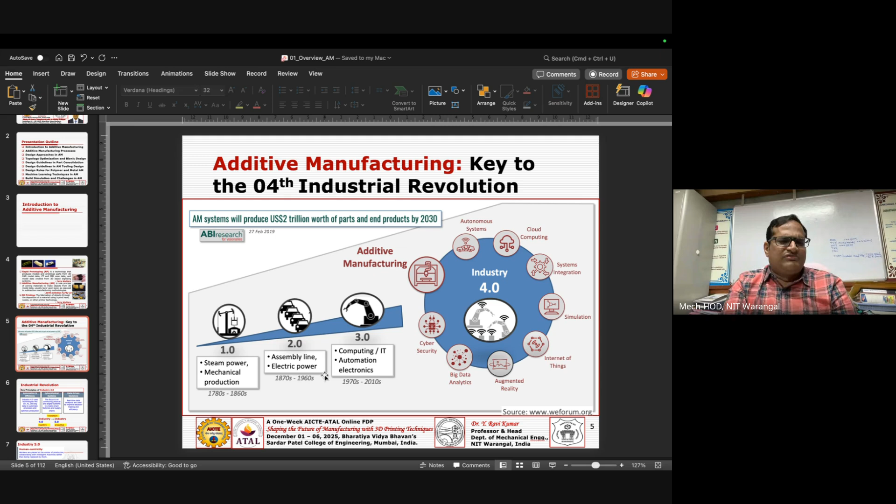Industry 5.0 is all about human centricity, resilience, and sustainability. So yeah, it's basically the time scale from one industrial revolution to the other. It started with 1, and now we are in the 5th industrial revolution. Yeah. Okay, thank you, sir.

Coming specifically to our group and our division, what we work on here is research and engineering on molten metal printing through the StarJet technology. This is part of additive manufacturing of electronics. With the help of StarJet, we want to take the additive manufacturing of electronics in a different direction, which I will present to you now.

The second direction is customization and personalization. This image shows a small blood pressure sensor produced from Hahn-Schickard Stuttgart. This is an ear wearable item which can analyze the blood pressure in a person, and it is customized to the shape of a person's ear. This is something which is also easily possible with additive manufacturing, as compared to printing the object and then applying some 2D printed circuit boards around it.

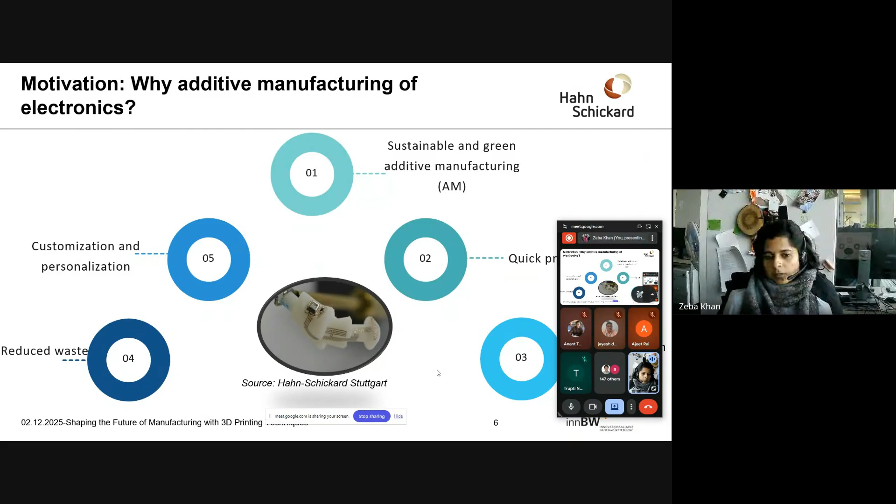Finally, one of the most important advantages is the smaller footprint that this technology presents. With this motivation, I would like to introduce you to the current research and its limitations in the additive manufacturing of 3D electronics. I'm pretty sure many of you must be aware of one of the leading companies in this direction, which is Nano Dimension.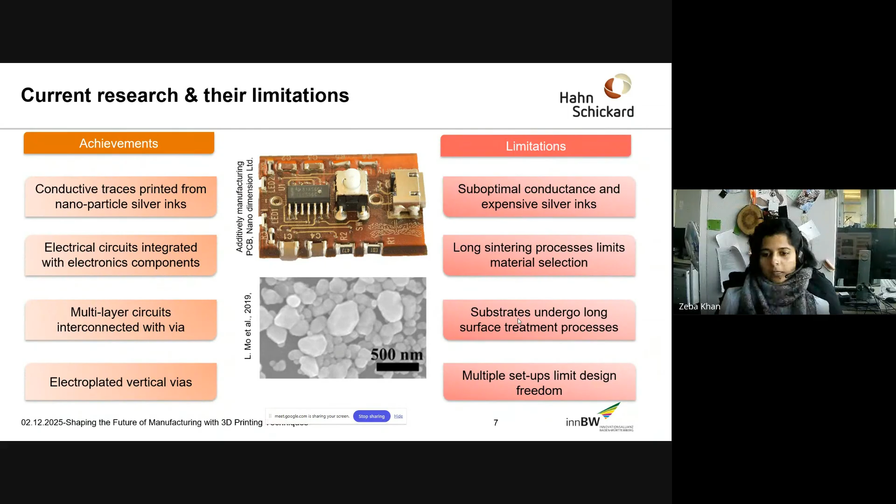For this particular idea, we go for our Starjet technology here at Hahn-Schickard. This Starjet technology is an innovative technology patented at Hahn-Schickard and the University of Freiburg.

This particular technology is able to perform digital non-contact printing of molten metals. That means the metal in its most raw form is used in the reservoir, and we're able to eject tiny molten droplets to create, in this case of additive manufacturing of electronics, conductive tracks.

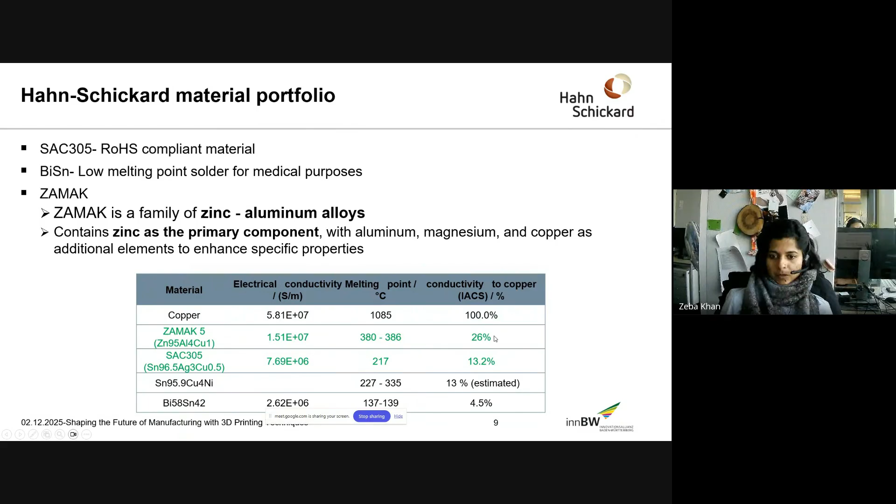Another material we also have is the bismuth material, which is a low melting point solder, which we also print for other applications. And now we also have some high melting point materials. If you see here in this chart, even though there are people who are able to print copper in terms of conductive inks, like I mentioned earlier, it is difficult to sinter it to the temperature where you can get the actual conductivity of the material. And that is where we have the advantage, because we are printing bulk metal, and despite this conductivity difference, we're able to achieve the conductance needed for the tracks.

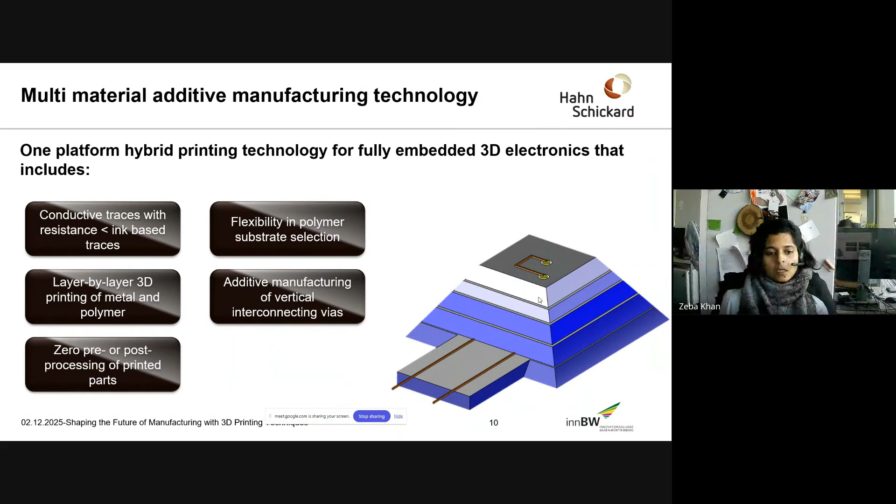Overall, this process does not require any pre or post processing. As I mentioned previously, the substrates for most of the dielectric based inks need some kind of surface treatment to ensure that the inks are able to adhere to the surface substrate. This is something we are able to eliminate with the help of our polymer portfolios. And we also do not need any post-processing of the printed parts, that means we do not need any sintering since our metal is in the bulk form.

And finally, we have application-oriented characterizations that we have developed here. That means we have done reliability tests, we have done some industrial scale thermal shock tests, etc.

To give you a brief overview of the concept of the hybrid metal printing, this methodology consists of an FFF printer. I'm pretty sure you've had a number of lectures already before where the FFF technology was elaborated, but just in a nutshell, the FFF printer works with the help of an extrusion-based principle. That means you have filament in the form of a spool, and this filament is passed through the heated nozzle and extruded as filaments and deposited layer by layer to create the substrate.

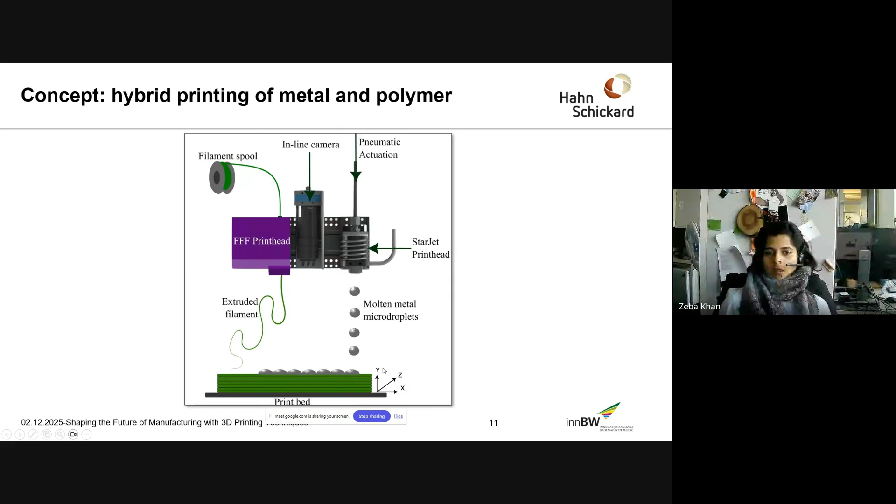Now, the concept behind hybrid printing is that we want to print two different technologies on the same machine without moving the object. So we have the FFF printer and the Starjet printer next to each other, and our concept was to print them sequentially, one after another, by depositing molten metal micro droplets next to each other and creating traces. For this technology, we created a model which was based on a Snapmaker A350.

Why do we need the stroboscopic camera for StarJet characterization? Because we know that in multi-material printing, or any kind of additive manufacturing, we want to present a sustainable approach. But the sustainable approach will not work if the products we are producing do not comply to the needs or requirements that we have.

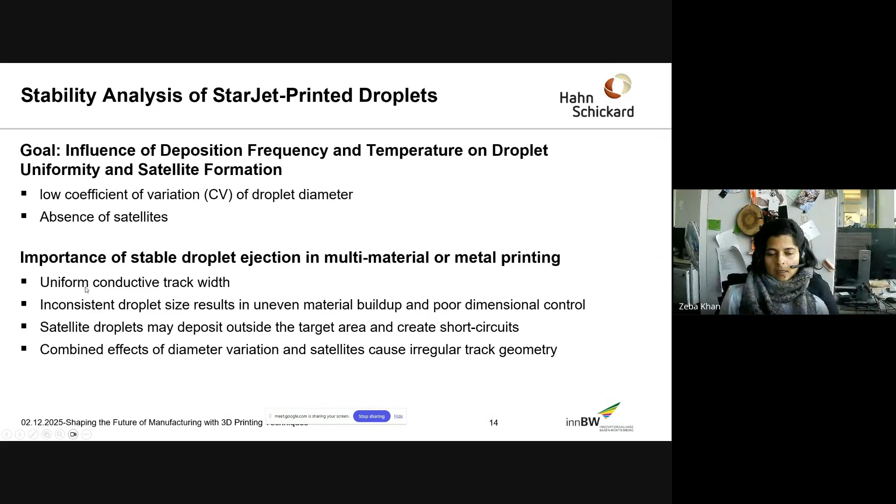In such cases, often there is more waste generated than profit from this technology. To ensure sustainable manufacturing, we make sure our droplets from the StarJet, where each droplet must be printed to have continuity in the conductive tracks, go through a thorough stability analysis. We use the same multi-material printing platform, focusing on the stroboscopic setup part of it. Let me give you a quick overview of how we do it.

We finally do some computation for the droplet volume and number of droplets. With this assessment, we are able to present the criteria with which we can see whether or not the metal printing we want from the StarJet is within the limitations and criteria that we want.

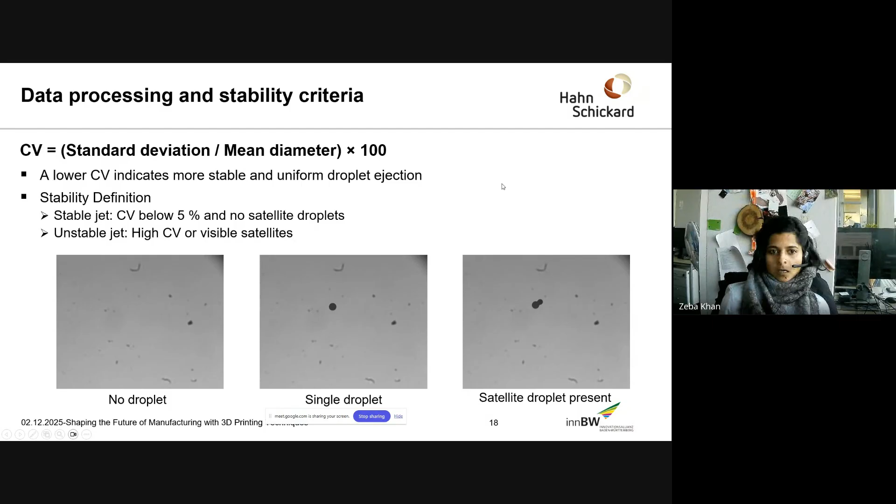For example, we set the criteria here that there should be no satellite droplets, which is often the case with most printing technologies. By doing a thorough analysis of hundreds and thousands of droplets at different reservoir temperatures and different deposition frequencies, we find the temperature and frequency with the lowest coefficient of variation, and select it to go forward with the hybrid printing of 3D electronics.

So this is just a quick overview to show how much assessment is done before the actual printing proceeds. In this particular hybrid printing technology we have several technological stages. The first consists of side-by-side deposition of metal on polymer.

In this model I showed you a USB plug-in based model that we printed here. The two traces coming out can be plugged into a USB connector to immediately verify the working of the device. In the next technological stage, we have embedding of these metal droplets.

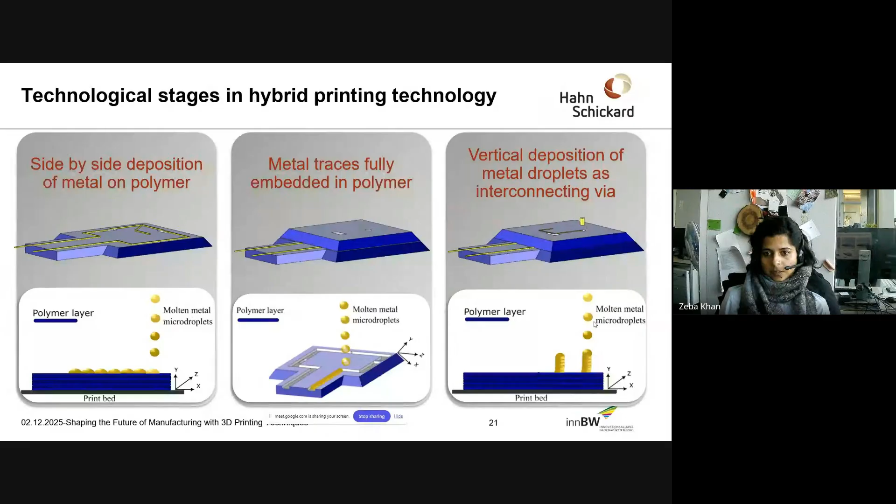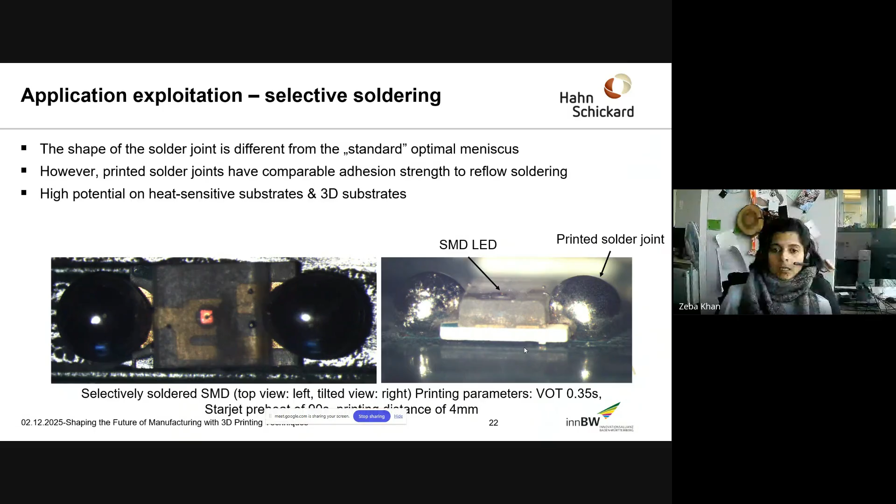We did different orientations because FFF, as you know, is not a very fine resolution printing technology. Rather, it presents a crude or rough surface area. And therefore, this also is very important to make sure we are able to test our capacity in different orientations of the FFF printing.

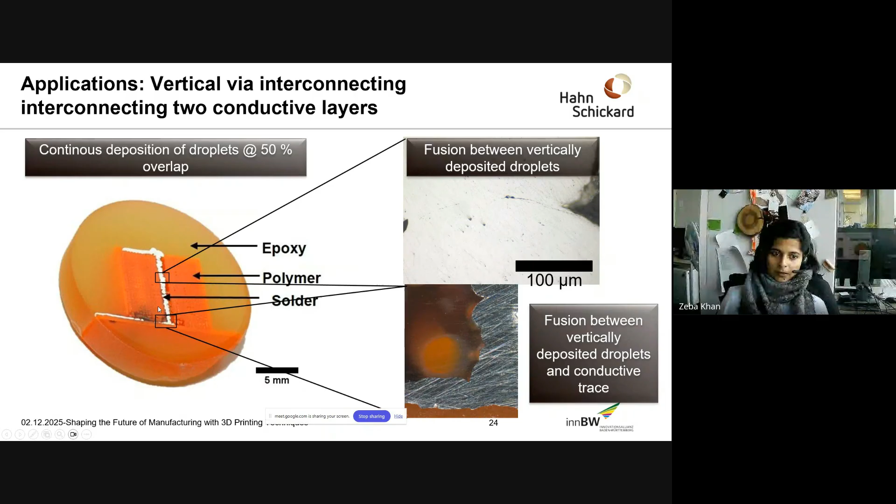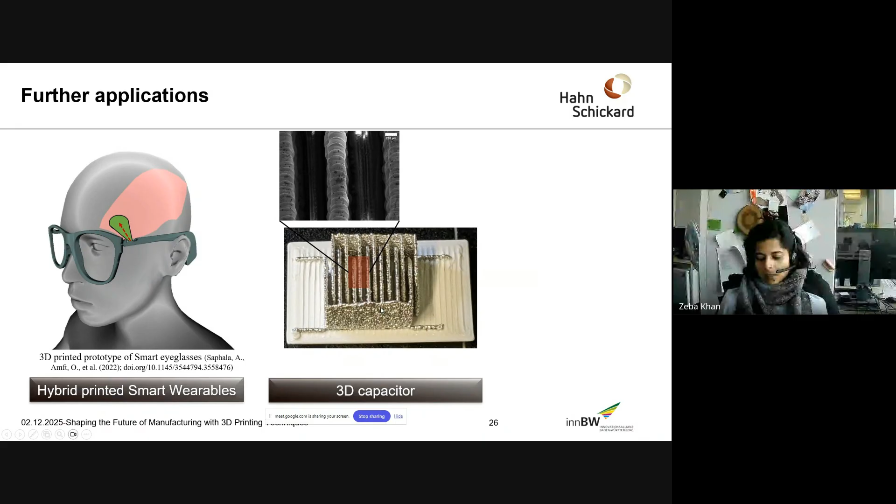Just an overview on the hybrid printed smart eyeglass model. In this, we created an eyeglass arm which was customized to the shape, with a proximity sensor and a PCB connector here, 2-layer connections, and these were connected with the help of the Starjet technology, and able to successfully detect the chewing activity of a person, because these sensors are near the eye, where there is the temporalis muscle, and this was able to detect the movement of the temporalis muscles with the help of these proximity sensors.

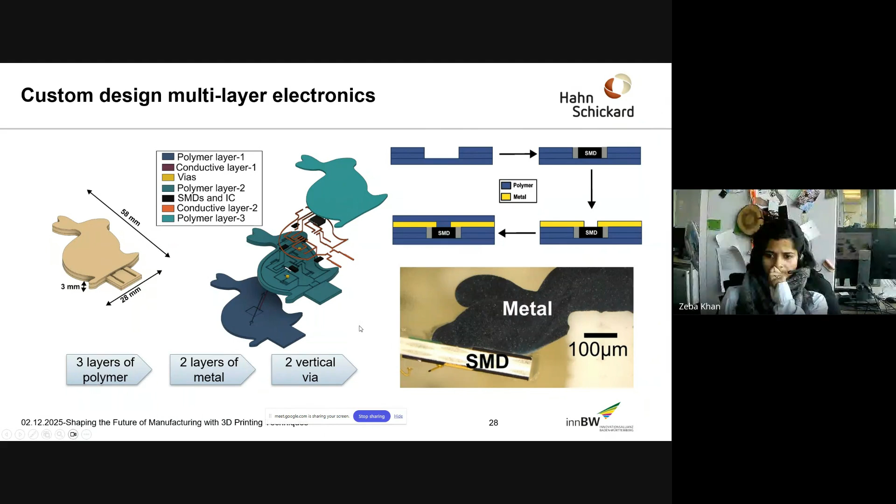We did a new method for presenting how we do the interconnection, because everything was done in one printing run. So there was no additional reflow soldering or anything, but it was simply made with the help of the Starjet. And this is here what we show, some of the tests done to see how the metal interconnects with the surface mounted devices.